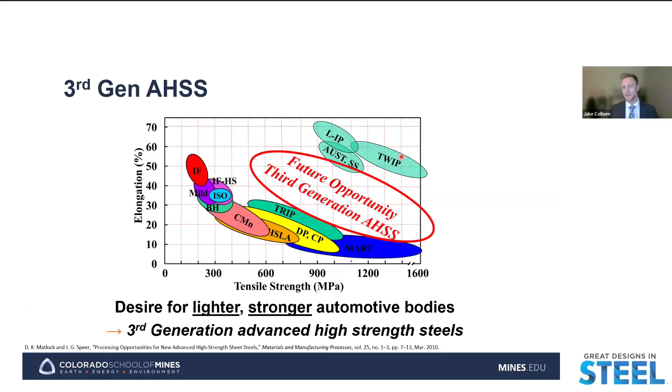While this is no longer a future opportunity, this is where we have been moving with the creation of medium manganese steels, quench and partition steels, and TBF steels, to name a few. The idea here is that we're creating these steels with a greater combination of elongation and tensile strength than the first generation advanced high strength steels, while still maintaining lower alloying cost than our second generation advanced high strength steels.

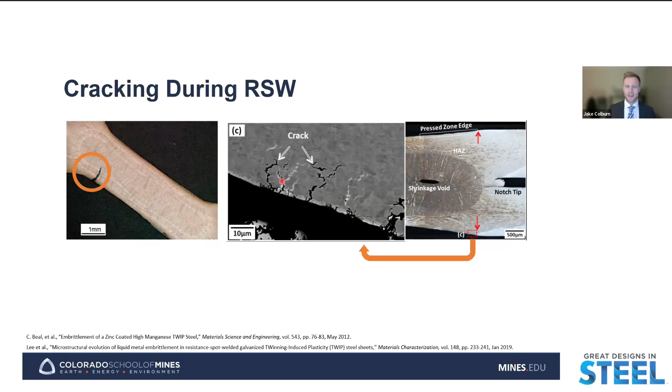However, when these third generation advanced high strength steels are galvanized with a zinc coating and then joined via resistance spot welding for the production process, we see that cracks can form along the weld shoulder and weld periphery, most notably for these steels. This cracking can lead to both the mechanical and aesthetic degradation of the welds, which can make it difficult for the automotive industry to implement these steels in usage for automotive bodies.

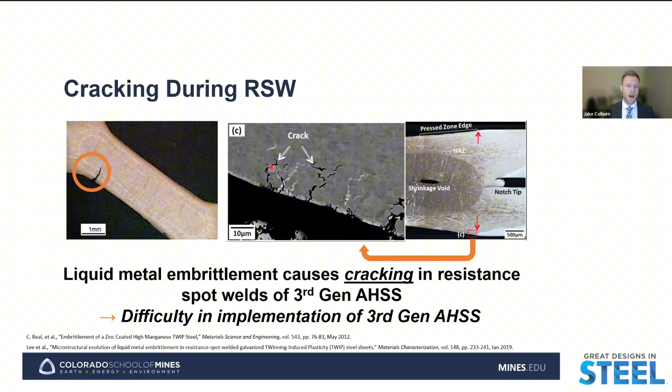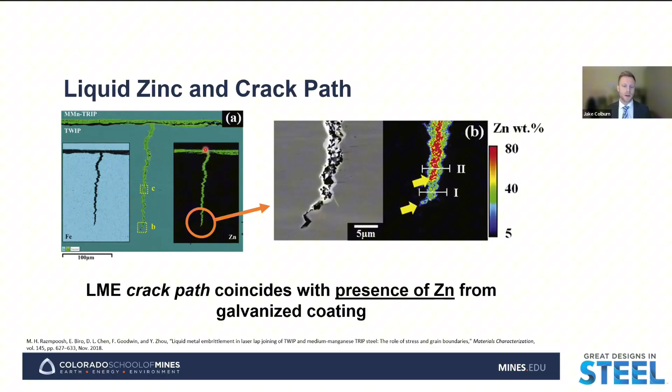Specifically for liquid metal embrittlement cracking, we saw those cracks that form in the weld shoulder, and we see that these cracks are always coinciding with the presence of zinc from the galvanized coating. This is one of the things hinting us towards the fundamental idea that LME cracking, liquid metal embrittlement cracking, occurs because as we see these cracks, we can also see the presence and penetration of zinc from the coating along with that.

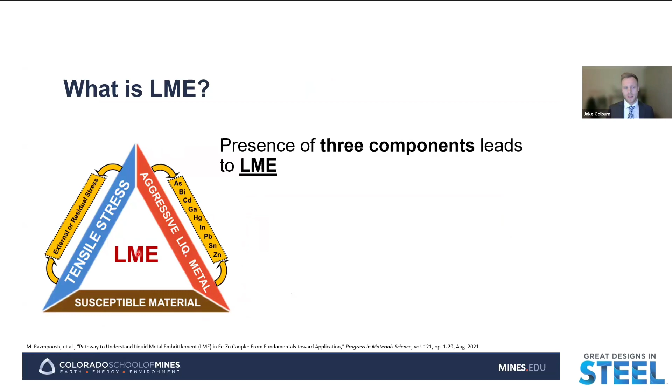I've mentioned liquid metal embrittlement, LME, a couple of times. So what specifically is LME? Here we have a triangle showing the three components necessary to create LME: tensile stresses, a susceptible material, and an aggressive liquid metal. These three components are necessary concurrently to both initiate and propagate LME.

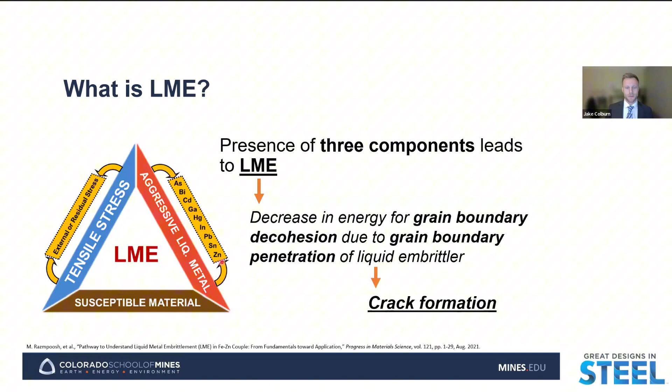LME can be defined as the decrease in energy for grain boundary decohesion due to grain boundary penetration of a liquid embrittler. Essentially, a normally ductile material behaves in a brittle fashion, and that brittle behavior is what leads to crack formation in these welds. While there are a number of binary LME couples we could be concerned with, the one we'll focus on for galvanized third generation advanced high strength steels is the zinc-iron LME couple.

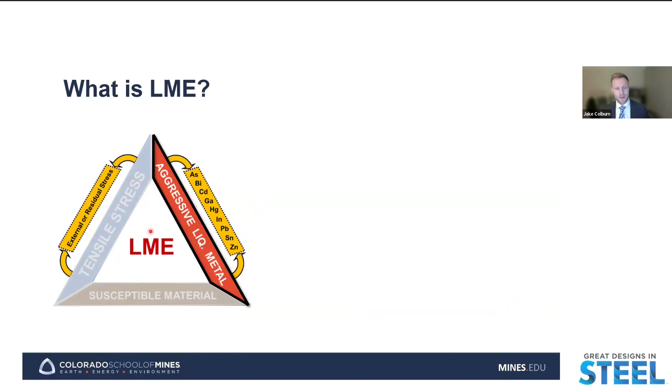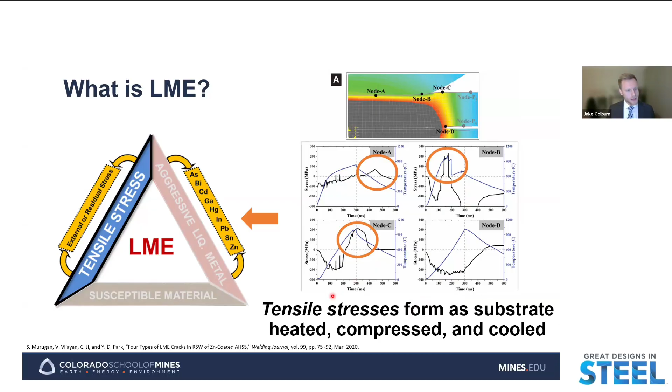As the substrate is heated during the weld cycle, we have compression from the electrode, and then rapid cooling is what develops these thermomechanical stresses necessary for LME.

As we look at our susceptible material, generally we're concerned with higher strength steels, around or above 900 megapascals, with higher fractions of austenite and martensite, and potentially bainite. For generally lower strength steels that may have larger fractions of ferrite, such as dual phase steels, LME is generally less of a concern - we have less LME susceptibility with those steels.

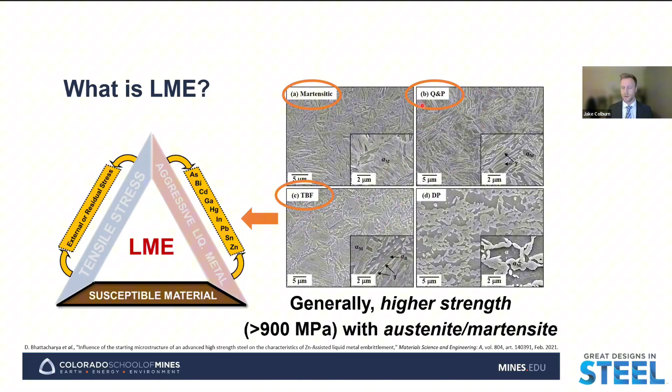However, if we have steels, even in our first generation class such as martensitic steels, that contain large fractions of martensite, retained austenite, and/or bainite - such as our Q&P and TBF third generation advanced high strength steels - these are steels more likely to exhibit LME and be susceptible to liquid zinc penetration and embrittlement.

As we think about how to tackle the problem of LME, how we can potentially mitigate or prevent it, the idea is that if you can remove the presence of one of these factors - remove a leg of this triangle during the weld process - then we should be able to mitigate or prevent LME, because we need the concurrent presence of all three factors.

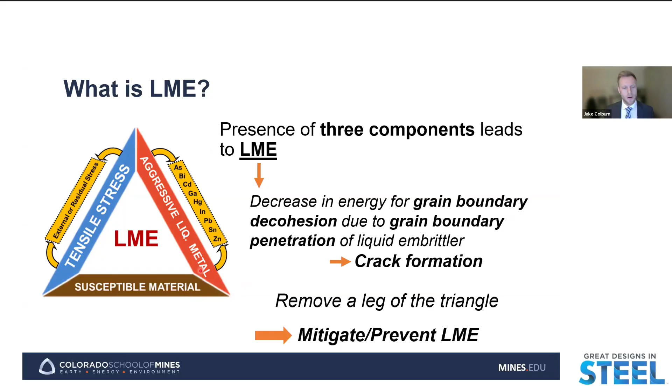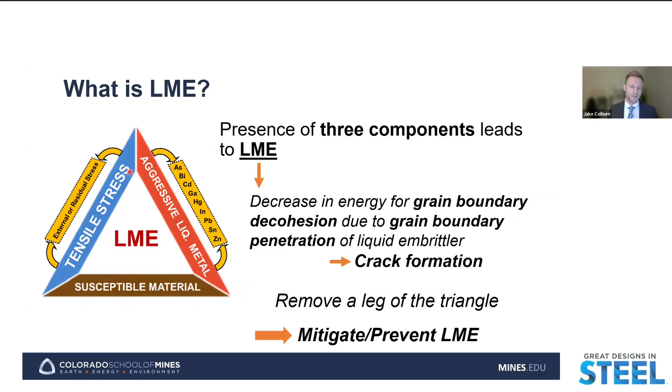Today we're going to look at how substrate composition affects LME susceptibility, seeing specifically how substrate composition can potentially either decrease or increase the susceptibility of the underlying substrate, as well as how composition in the substrate can potentially affect the presence of this aggressive liquid metal, the liquid zinc.

With that, we'll take a look at this example case examining the effect of substrate silicon and aluminum content on LME susceptibility for third gen advanced high strength steels. But first, we're just going to focus on silicon content and its effect on LME susceptibility. Here on the left, we have the composition of the two alloys we're looking at.

As a third gen steel, quench and partition microstructure, we see our four main alloying elements of concern: silicon, aluminum, carbon, and manganese. For these two alloys, we have equal compositions of aluminum, carbon, and manganese, and we're varying the silicon content from a relatively low level of 0.5 weight percent to a relatively higher level of 1.5 weight percent.

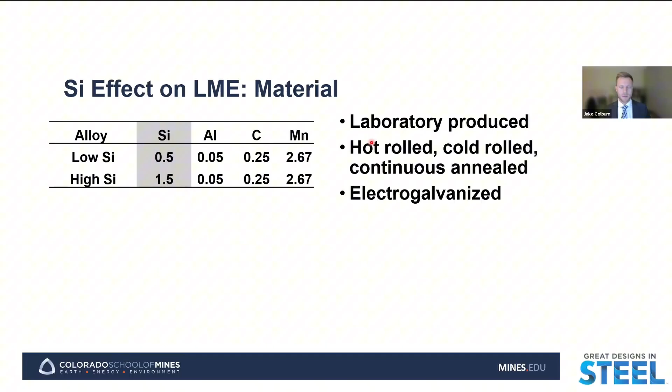The reason we have the addition of silicon and also aluminum is that those can act as carbide suppression during the quenching and partitioning process, and then also act as solid solution strengtheners. These two alloys were laboratory produced, hot rolled, cold rolled, and then went through continuous annealing simulations, and then were electrogalvanized with a pure zinc coating.

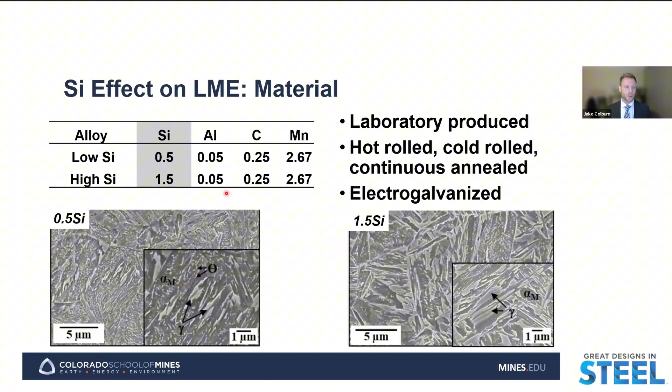If we take a look at the microstructures that we have for these two alloys, we see what we would expect again for a quench and partition microstructure: relatively high fractions of martensite, some retained austenite present, but then also notably a higher fraction of cementite or carbides in the lower silicon containing steel, due to having that lower alloying presence of a carbide suppressor in this alloy.

As we begin looking at the LME testing, one of the first tests we can do is hot tension testing, which is essentially a thermomechanical simulation of the resistance spot weld stress and thermal conditions. Of course, this is going to be a simplified condition of our stress and thermal states, because many of the stress and thermal states during resistance spot welding can be much more complicated than just the uniaxial tension we're applying during this test.

Here we have our tensile specimen that will be rapidly heated up to our test temperature, held for a short amount of time, deformed to failure, and then rapidly quenched. This test temperature at which we choose to hold the material is going to be important for both the underlying substrate microstructure, but also in terms of what iron-zinc intermetallics we could potentially expect to be present upon deformation.

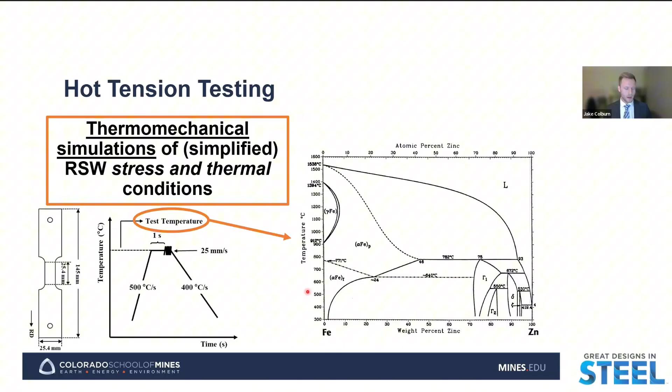Here we have our iron-zinc binary phase diagram. If we look at the zinc-rich corner of the phase diagram, we see that in our general test temperatures for hot tension testing, around 600 to 900 degrees Celsius, we have a range of different iron-zinc intermetallics, as well as the phase fraction of those intermetallics and the liquid phase present, depending upon what test temperature we'll be at and how much diffusion has occurred from the coating, and how much zinc and iron is present at that point.

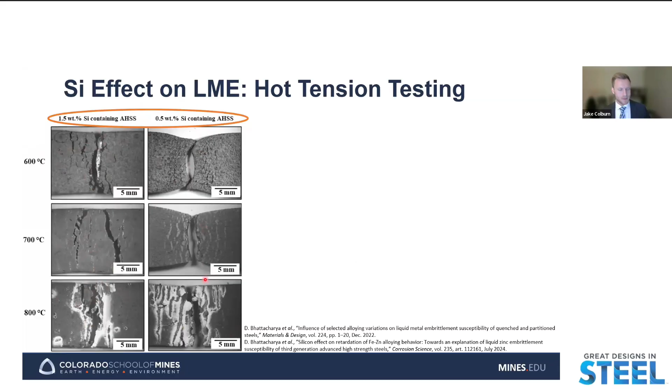The main thing we can see here is this relatively lower degree of necking in the high silicon containing advanced high strength steel, which is going to be indicative of a lower degree of ductility during testing.

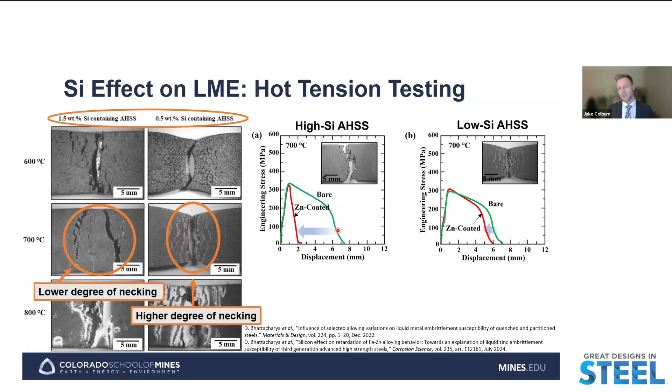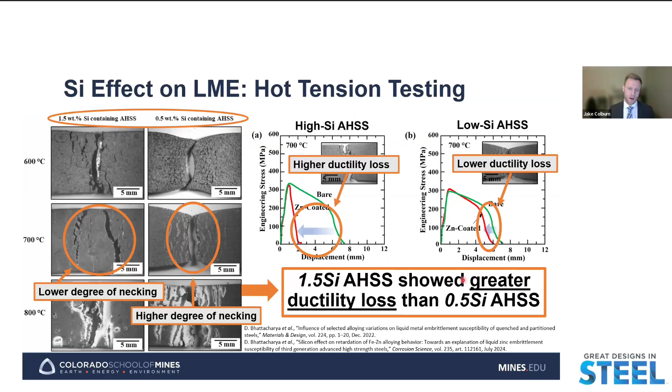We can also take a more quantitative look at the ductility loss when the sample is compared to its bare state versus its coated state, again testing at that temperature of 700 degrees C. What we see here is that there is a greater ductility loss between the bare and zinc-coated steel for the high silicon containing steel as compared to the lower silicon containing steel at 700 degrees C. Overall, we can say that this 1.5 silicon advanced high strength steel showed a greater ductility loss, a greater degree of embrittlement than the lower silicon containing steel.

If we want to take a deeper look into potentially why we're seeing the differences in this behavior, we can start by looking at some of these SEM images of the cross-section of the hot tension samples after testing at 700 degrees C.

Here we have backscatter electron images, where the contrast is going to be related to the atomic number of the elements we're looking at. Zinc, having the highest atomic number of the elements we're looking at, is going to appear with the lightest contrast. So when we have those regions of zinc that have alloyed some with iron, we're going to see a darker contrast.

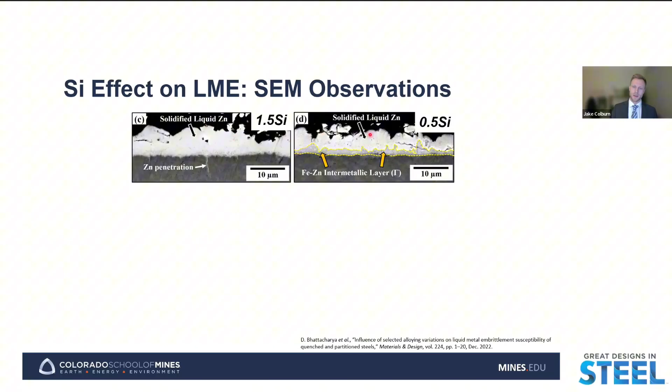And that's what we see here on the right with our low silicon containing steel, where at the interface we see the presence of this iron zinc intermetallic layer, specifically the gamma phase. And this gamma phase is important because its formation can consume the liquid zinc that is present, as well as act as a physical barrier to further zinc penetration.

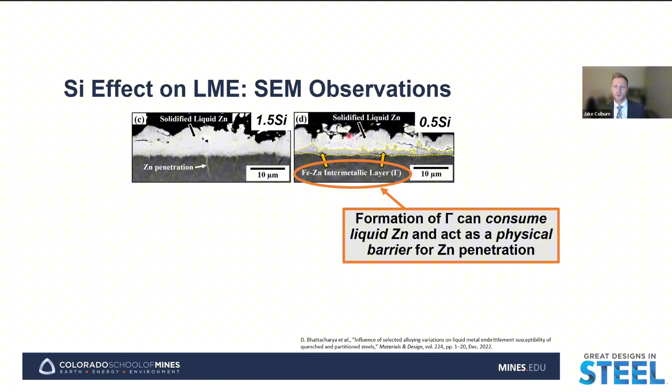So we see at elevated temperatures, at our test temperature, if this continuous physical layer of the gamma is present and we have liquid zinc above, that's going to create a barrier to the liquid zinc further penetrating the substrate, whereas with the high silicon containing steel, we don't see the presence of that intermetallic layer, and we're readily able to get zinc penetration into the substrate because there's no inhibition of the zinc into the substrate.

And then if we zoom in a little bit and take a look at a TEM lift out of the interface of that high silicon containing cross-section of the hot tension sample, here we have a STEM EDS line scan - scanning transmission electron microscopy, energy dispersive spectroscopy scan through here to where we see the composition of this line as we move from the top of this region of the coating into the substrate.

And of noticeable concern here, when we look at the silicon concentration across this line, we see a noticeable enrichment of silicon at the interface that is above that of the bulk composition. So again, if our bulk composition is around 1.5 weight percent, we see an increase of that up to roughly 3 to 4 weight percent at the interface.

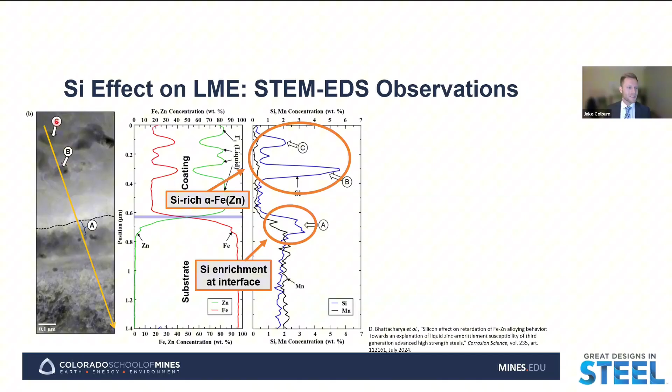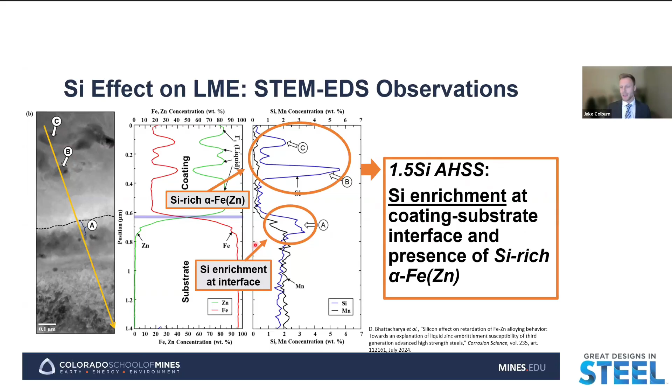But we also see the presence of these silicon-rich alpha iron zinc islands. This alpha iron zinc phase is essentially a BCC iron phase that has appreciable solubility for zinc, as well as also having a decent solubility for the silicon phase. So we see these little islands here pointed out by C and B over here of this alpha phase. Again, for the high silicon containing steel tested at 700 degrees C, we see this silicon enrichment at the interface as well as the presence of these iron alpha zinc phases.

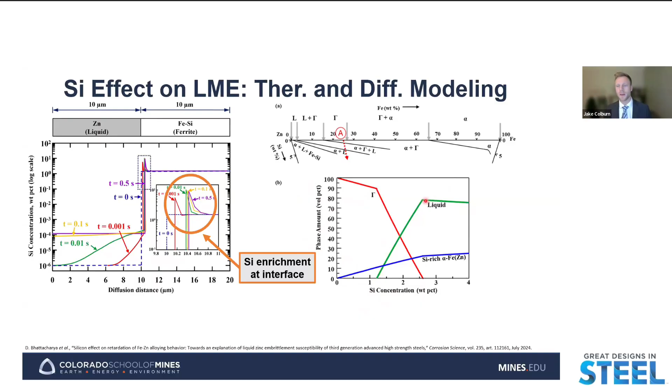And what we see is that as the silicon concentration increases at the interface, we have a decrease in the equilibrium phase fraction of the gamma phase, and then an increase in the equilibrium phase fractions of the liquid and the alpha iron zinc phases. And so that's important because if we're increasing the phase fraction, if we're further stabilizing the liquid phase, that is going to be detrimental to LME susceptibility because this is the phase that is necessary to initiate and propagate LME.

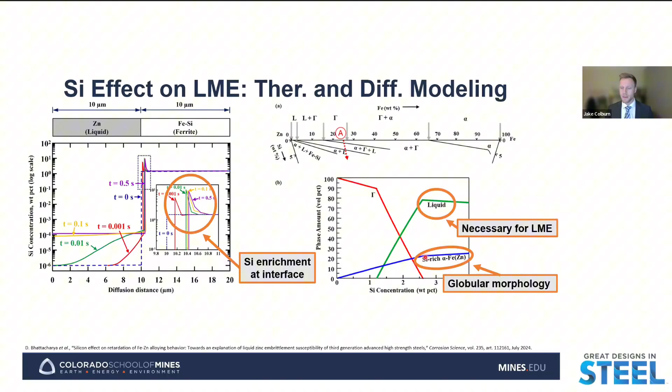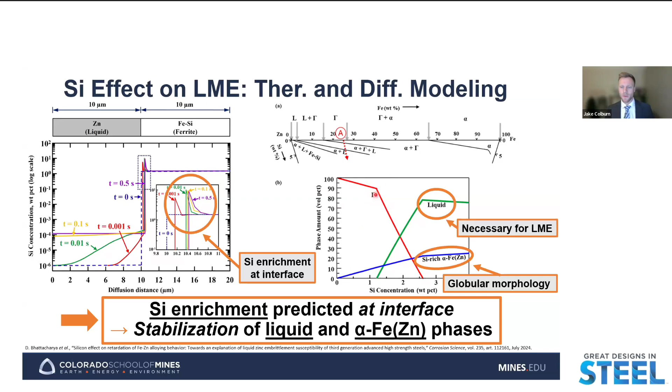If we're also stabilizing the alpha iron zinc phase instead of the gamma phase, we're stabilizing a phase that, especially in these lower volume fractions, is likely to form in a globular morphology, like those small islands we saw in the STEM image. This is what we see generally with the alpha iron zinc phase. So as we're increasing the silicon concentration in the substrate and getting enrichment at the interface, we have a detrimental situation for LME susceptibility by inhibiting formation of the gamma phase, while also stabilizing these two potentially detrimental phases for LME susceptibility.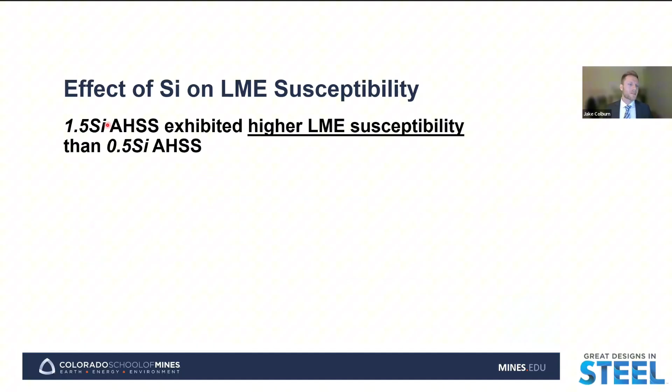If we put most of those results together, we can see that the higher silicon-containing steel exhibited higher LME susceptibility than the lower silicon-containing advanced high-strength steel. We can attribute much of that to increasing silicon content at the interface, which we saw led to suppression of the iron-zinc intermetallic reaction, specifically the gamma phase. Overall, that leads to increased liquid fractions or increased liquid availability at the interface, and therefore increased LME susceptibility. Now we're going to take a look at something else.

That's specifically looking at silicon, but now we can take a look at the effect of aluminum content on LME susceptibility. The main reason we want to do that is that, as an alloying addition, if we want to keep silicon concentration lower to not increase LME susceptibility, we can substitute some of silicon's carbide suppression and solid solution strengthening effect with aluminum. Here again we have two alloys we're comparing that have equal compositions of silicon, carbon, and manganese, changing the aluminum concentration from a low value of 0.05 weight percent to a high aluminum alloy at 1.38 weight percent.

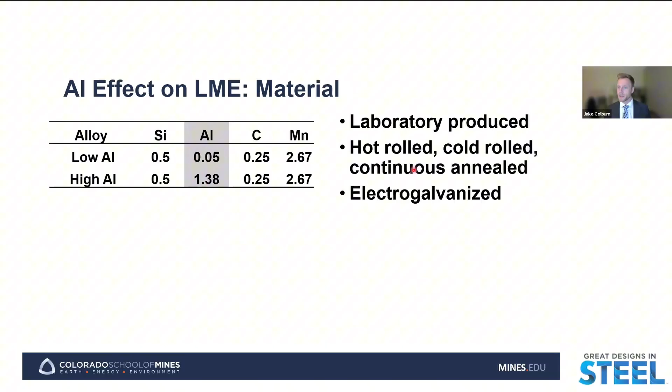These two alloys were also produced in the same way as the previous ones: laboratory produced, hot rolled, cold rolled, went through continuous annealing simulations, and then were electrogalvanized with a pure zinc coating.

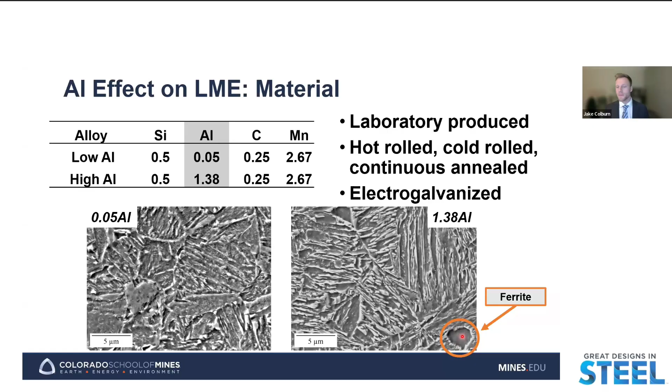If we take a look at the microstructures of these two alloys, what we see is again what we'd expect for a quench and partition microstructure: a relatively high volume fraction of martensite, some retained austenite. But notably for our higher aluminum alloy, we still see some ferrite present - this darker contrast region we identify as ferrite, also up here at the top of the micrograph. Due to the higher AC3 temperature of the high aluminum alloy, likely full austenitization was not achieved during the continuous annealing simulation, so there's potentially some ferrite still present near the surface of this alloy.

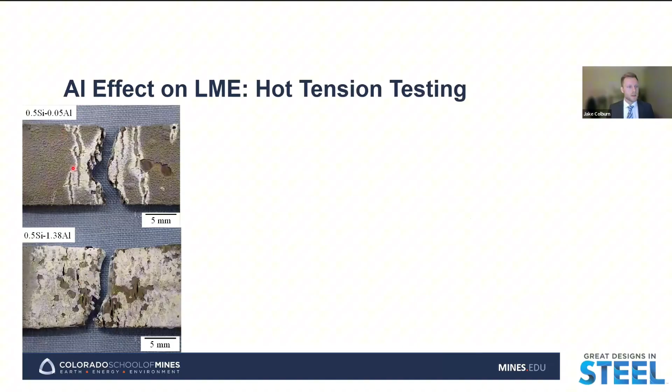If we take a look again at our hot tension test results and our macrofractography here, the low aluminum alloy at the top, the high aluminum alloy at the bottom, tested at 800 degrees C, we see a slightly greater reduced area, indicative of greater ductility present at elevated temperatures for the high aluminum alloy, as well as more secondary cracking appearing - these small cracks we see on the surface - more so in the high aluminum alloy compared to the low aluminum alloy, where a majority of the cracks seen on the surface are just cracks in the solidified coating layer.

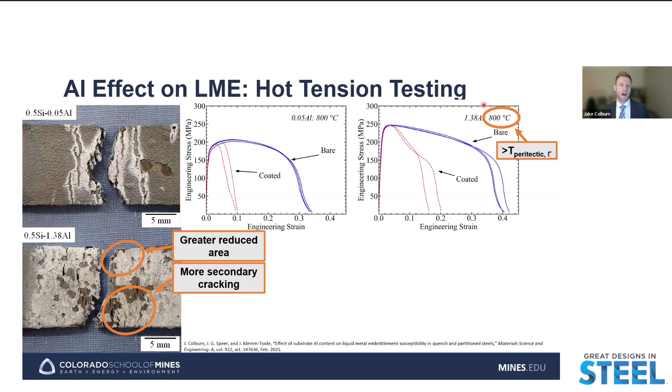This testing was done at 800 degrees C, a notable temperature because we're now above the peritectic temperature for the gamma phase. In the binary iron zinc system, we'd expect the gamma phase is not going to be stable at this test temperature. If we compare the ductility losses between the bare and coated samples of these two alloys during the hot tension test from the stress strain curves, we see a lower ductility loss for the higher aluminum alloy, to a lower extent than what we saw comparing our high and low silicon alloys, but still a noticeable difference in ductility loss between these two alloys.

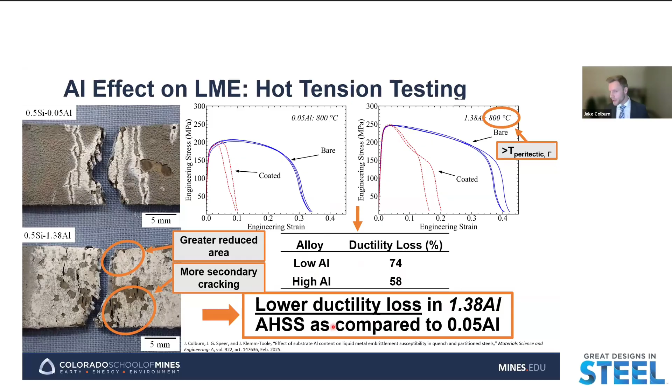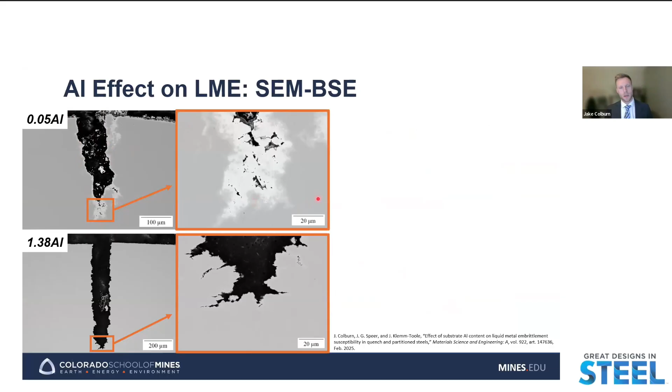We would say that the higher aluminum alloy exhibited lower ductility loss, a lower degree of embrittlement in this test. So then we start by looking at the backscatter electron images of the crack tips of an LME crack for the low aluminum sample here at the top, and the high aluminum alloy here at the bottom.

What we see here is that there is this greater degree of zinc enrichment penetration in the low aluminum alloy when compared to the high aluminum alloy. This contrast here, this lighter contrast, is indicative of higher levels of zinc in that area, and this was confirmed with the EDS.

But that higher contrast region is not really seen as much with our high aluminum alloy as compared to the low aluminum alloy. This is potentially indicative of the relative amount or availability of zinc during testing, potentially having higher levels of that zinc availability in the low aluminum alloy as compared to the high aluminum alloy.

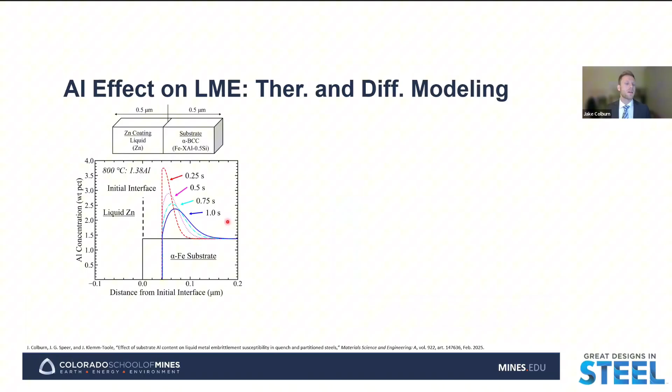We see that after simulating at 800 degrees C for 1 second, we again, like silicon, see this potential enrichment of aluminum at the interface due to the low solubility of aluminum in the liquid phase as compared to iron. So if we expect a change in that local composition at the interface, we can expect that there will potentially be a change in what phases are present and the equilibrium fraction of those phases present at the interface.

Like before with silicon, we can calculate the phase volume fraction versus the aluminum concentration at the interface. Rather than seeing that monotonic behavior that we saw with silicon, where increasing silicon content decreased the gamma phase stability across all the compositions...

Here we see that there is an intermediate range of aluminum concentration at which the gamma phase has a higher volume fraction stable than the liquid phase.

As we add aluminum up to about 3 weight percent aluminum, the liquid phase is destabilized and the gamma phase is further stabilized. But if we go higher than that, we then begin to stabilize the liquid phase and the alpha iron phase.

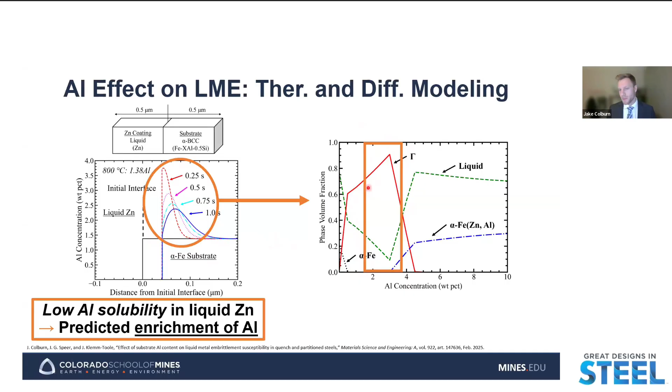But if we look at what our bulk composition is, starting at 1.38 weight percent and then potentially enriching in that 2 to 4 weight percent range, we're still in this orange box of our composition where we have much higher equilibrium volume fractions of gamma phase stable as compared to the liquid phase. So we would expect that with that interfacial composition, the gamma phase would be stable.

We would say that this is potentially going to be beneficial for LME susceptibility, decreasing the availability and presence of the liquid phase at the expense of having more of the gamma phase present.

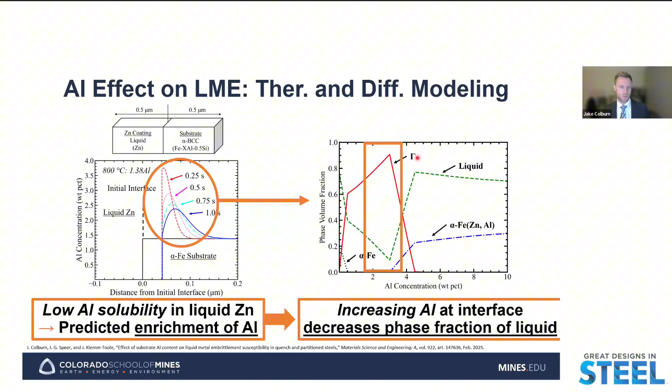We can also take a look at how the change in the substrate aluminum concentration is going to affect the diffusion of zinc into the substrate, or affect the solubility of zinc in the substrate. Here we have calculated the mass fraction of zinc in those substrate phases at 800 degrees C for increasing aluminum concentration at different zinc concentrations in the substrate.

The main trend that we see here is that as we increase the aluminum concentration in the substrate, or at that interface, we see a decrease in the mass fraction of zinc in the substrate, or essentially what the maximum solubility of zinc in the substrate would be. We see a decrease with increasing aluminum content.

But even more than that, we see that increasing aluminum concentration in the substrate also affects the diffusivity of zinc in the substrate, such that as we increase the aluminum concentration at different zinc contents in the substrate, we see the diffusion coefficient of zinc generally decreases.

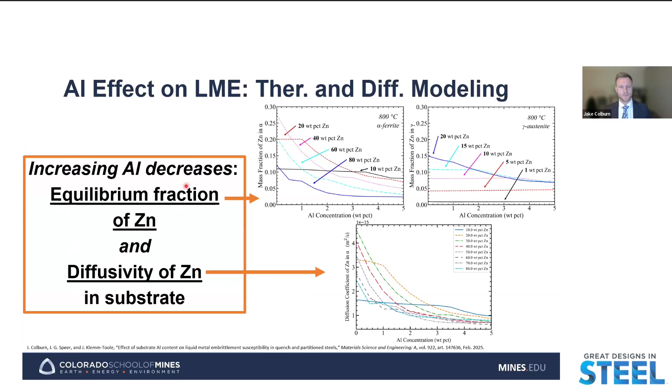So we could say that there is a general decrease in the diffusivity of zinc in the substrate with increasing aluminum content. With those two factors, if we're concerned with the flux of zinc, the diffusion flow of zinc into the substrate, we can go back to Fick's first law, where the flux of the diffusing component into another component is equal to the product of the diffusivity of that diffusing component and the concentration gradient of that diffusing component.

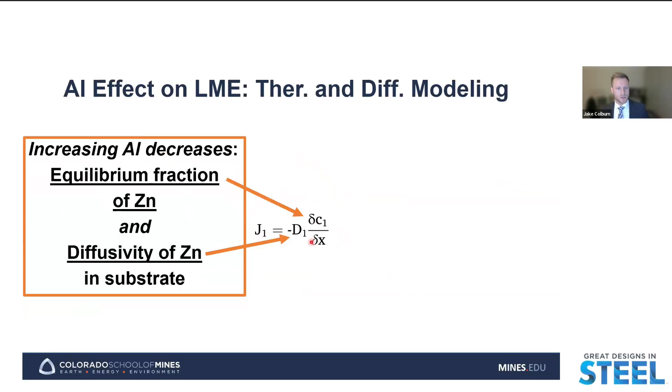Those are essentially two of the factors we just saw calculations for. If we're interested in looking at this composition or concentration gradient, we can take a look at the schematic here on the right, where we have our high zinc-containing liquid zinc on the left side, our substrate on the right side, which initially has 0 zinc concentration. Here at the interface, if we're changing the maximum solubility or equilibrium concentration of zinc in the substrate by adding aluminum, we're going to be changing the concentration gradient into the substrate.

So we see that moving from a low aluminum concentration at point A to a high aluminum concentration at point B is going to decrease the equilibrium fraction of zinc, the maximum solubility of zinc in the substrate, such that as we move a distance into the substrate where there is no zinc, that concentration gradient is going to be decreased.

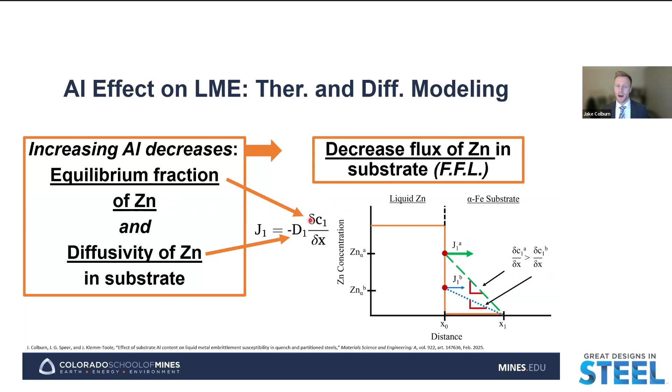So we see that increasing the aluminum concentration should potentially decrease the flux of zinc in the substrate through both of these factors, by decreasing both the diffusivity of zinc and the concentration gradient of zinc into the substrate.

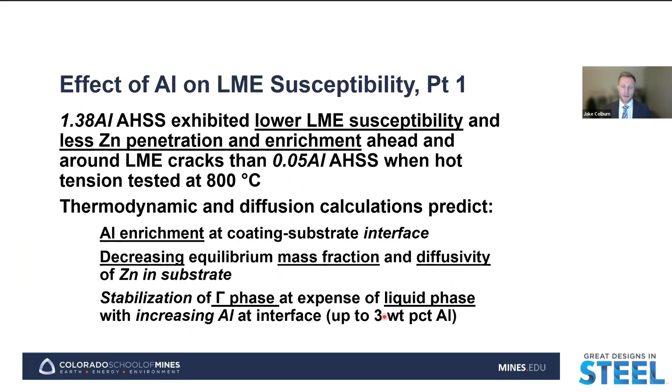So taking some of those points together in a quick sub-summary: the higher aluminum alloy showed lower LME susceptibility and zinc penetration and enrichment compared to our low aluminum alloy. From those thermodynamic and diffusion calculations, we predicted potential aluminum enrichment at the interface, a decrease in the equilibrium mass fraction and diffusivity of zinc in the substrate, and the stabilization of the beneficial gamma phase at the expense of the detrimental liquid phase with increasing aluminum at the interface, up to roughly 3 weight percent aluminum. Above that, the liquid phase begins to be stabilized to a greater degree again.

So then the next step was to ask: if those are the conclusions from hot tension testing, will we see similar results in resistance spot weld testing?

The LME testing in resistance spot welding consisted of creating a single square pulse weld at an increasing current through the 6 to 9.5 kiloamp range in 0.5 kiloamp increments, with a weld time of 600 milliseconds, roughly twice the standard for this sheet thickness. We did that to ensure adequate heat input to initiate LME at each of the weld conditions used.

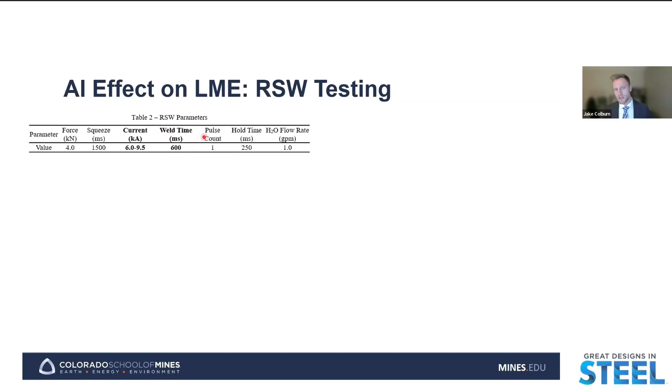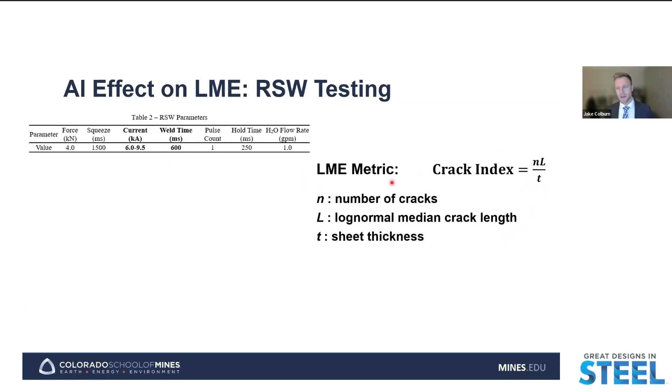The LME metric we're interested in using here is the crack index, which is the product of the number of cracks and the log-normal median crack length for a given sheet thickness. A higher crack index is indicative of higher LME susceptibility because there's either a greater number of cracks and/or a greater average length of those LME cracks.

Here's the figure on the left, comparing the average crack index of these two alloys at different weld currents relative to the expulsion current. We compare relative to the expulsion current to try to compare these welds at relatively equal heat inputs, because these two alloys have different expulsion currents due to the higher alloying addition in the high aluminum alloy. We see that the higher aluminum alloy exhibited a lower crack index, or lower LME susceptibility, at each of these current levels, except at the 0.5 kiloamp condition, where we see relatively equal LME susceptibilities or crack indexes for the two alloys.

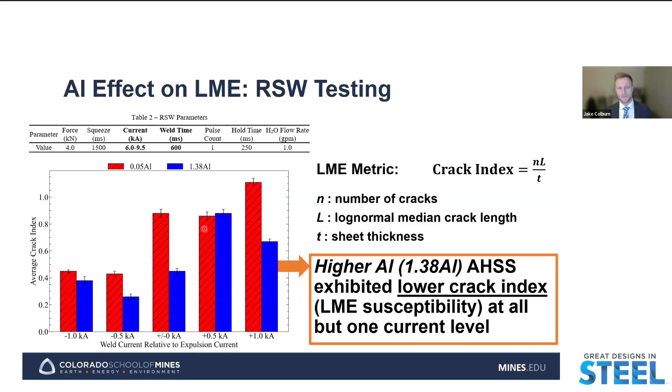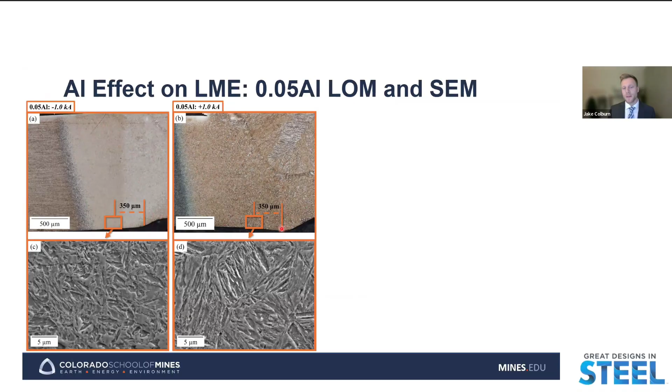Now taking a look at the cross-section of these welds, here we have the low aluminum alloy welded at 1 kiloamp below and above its expulsion current. We see a cross-section of the weld with the weld shoulder and weld periphery in these optical micrographs, where the substrate was etched with 2% nital. What we see is that even 350 microns into the weld periphery, we still see what could be described as the supercritical heat affected zone, where the microstructure is mostly martensitic with potentially still some bainite at this lower current.

This would indicate, if this is a supercritical heat affected zone, that at the peak temperature of the weld, this region was likely fully austenitic. Then as the weld current stopped and the substrate rapidly cooled, we get this transformation to martensite and/or bainite present.

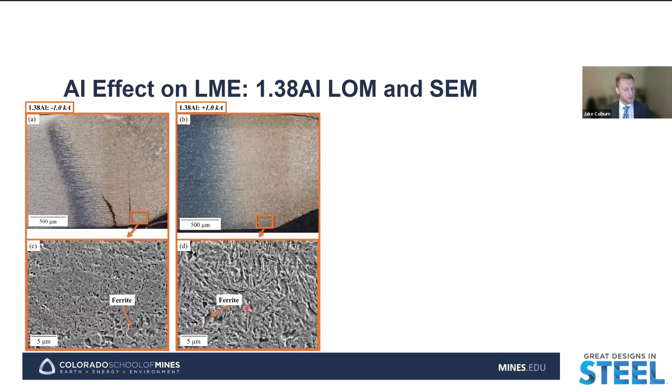But then when we compare that to the high aluminum alloy, looking at the optical micrographs of the high aluminum alloy welded at 1 kiloamp below and above the expulsion current, we see that at the weld shoulder there's still noticeable amounts of ferrite present in the microstructure. So we can describe this as being part of the intercritical heat affected zone in the weld periphery.

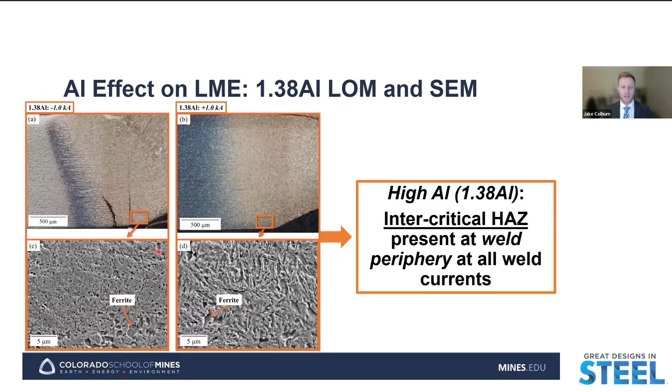So at the peak temperature of the weld, we would expect that this region was potentially austenite plus ferrite as well, and that there wasn't full austenitization of this region at the peak temperature, so that ferrite remains stable upon quenching. And as we take a look at the transformation temperatures, we see that this trend begins to somewhat make sense.

As we compare the AC1 and AC3 temperatures for these two alloys, the AC1 temperature, being the temperature upon heating which we enter the austenite plus ferrite two-phase region, we see roughly equal values there, 740 degrees C for the two alloys.

But then as we look at the AC3 temperature, that's the temperature heating from the austenite plus ferrite two-phase region into the single-phase austenite region, we see an increase of roughly 120 degrees Celsius for the high aluminum alloy, which is then also going to increase the width of that intercritical transformation temperature range, that being the difference between those two transformation temperatures.

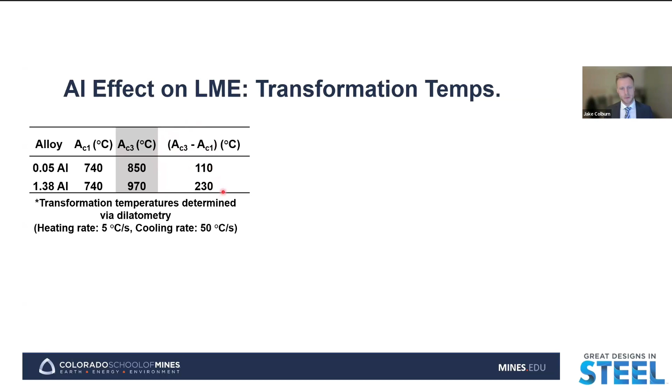So if we again go look back at the high aluminum and low aluminum optical micrographs of these welds, what we see is again indicative of these transformation temperatures, where we see a smaller intercritical heat affected zone width for both currents as compared to this wider intercritical region that we see for the high aluminum alloy, where there's still ferrite present in these regions.

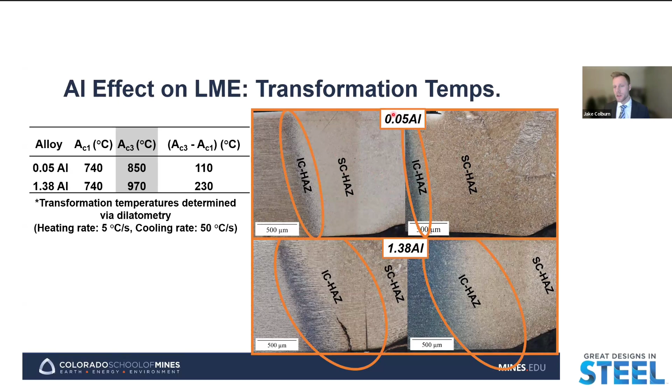And then if we take a look at the supercritical heat affected zone, we see that that region extends to much greater distances into the weld periphery for the low aluminum alloy than we see for the high aluminum alloy, where potentially this supercritical heat affected zone is not extending at all into the weld shoulder and the weld periphery.

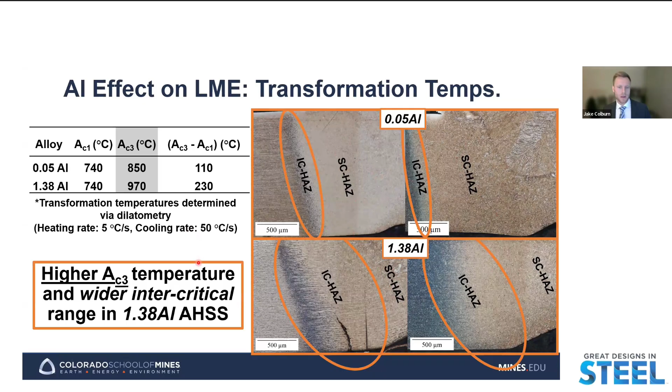So then the question is, why does it matter if we have an intercritical or a supercritical heat affected zone at these LME susceptible regions?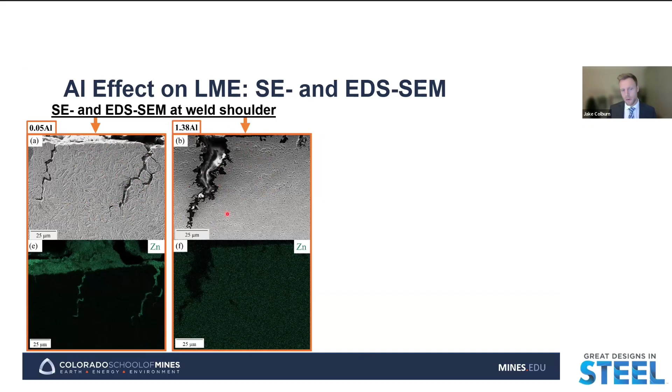But more than that, we also see that there's a difference in the zinc penetration and enrichment between these two alloys, where in the low aluminum alloy we have this noticeable zinc penetration and enrichment along and ahead of these LME cracks at the shoulder, whereas with the high aluminum alloy there's really no noticeable zinc enrichment or penetration that we can detect here in EDS with the scan, to where any of this zinc contrast that we see here is just going to be background noise due to a difference in the counts per second between the substrate and the mounting material.

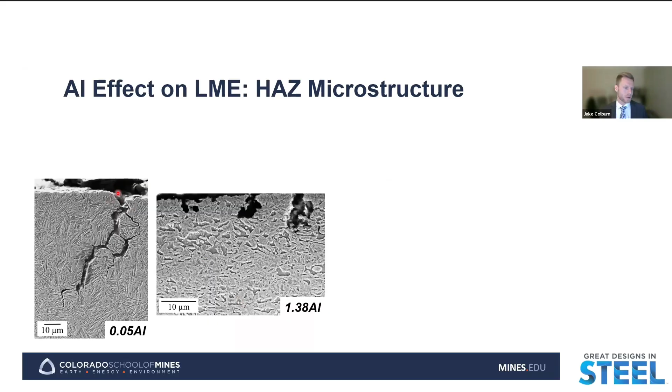But even more than just affecting potentially the zinc enrichment penetration behavior, changing whether we have an intercritical or supercritical microstructure at these LME susceptible regions can potentially affect the crack propagation path. At peak temperatures, we expect the supercritical heat affected zone to be single phase austenite, so we can get zinc enrichment penetration along those prior austenite grain boundaries more easily than in the intercritical microstructure, where we have austenite plus ferrite at peak temperatures. We can even see here these small cracks formed that are roughly 10 microns or less, where there's potentially some crack arresting here due to not having sufficient zinc penetration into the substrate.

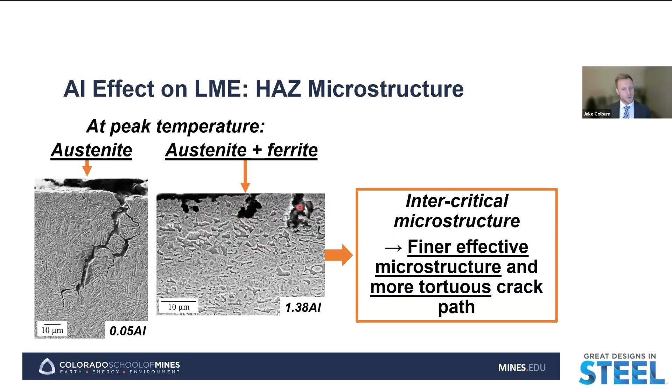So at the austenite plus ferrite phase, we can have this finer effective microstructure at peak temperature, as well as potentially a more tortuous crack path that makes it more difficult for cracks to propagate and grow.

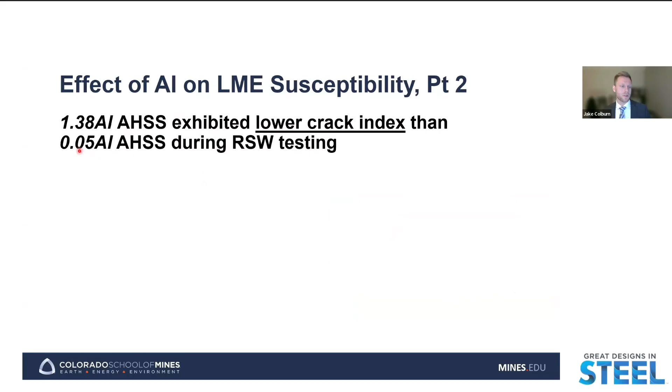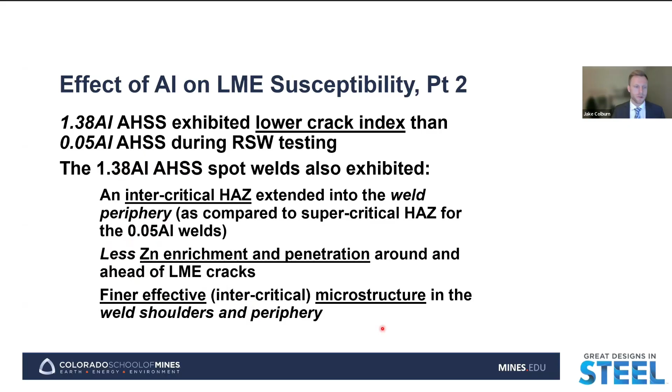Putting those conclusions together, we see that the high aluminum alloy exhibits a lower crack index during spot welding testing than the low aluminum alloy. The high aluminum alloy showed an intercritical HAZ in the weld periphery compared to the supercritical HAZ in the low aluminum alloy. We also saw less zinc enrichment and penetration for the high aluminum alloy, and a finer effective microstructure in the weld shoulder and periphery.

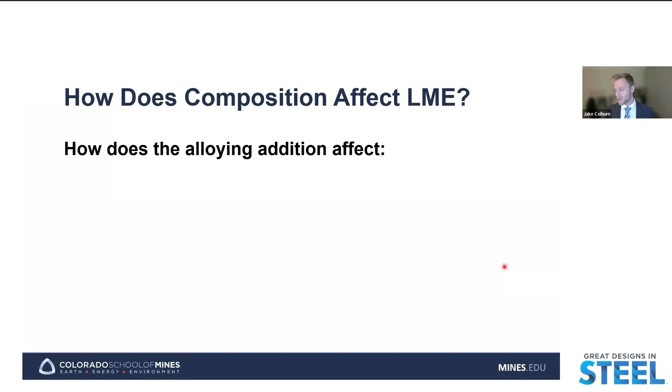With that, we want to take some of those conclusions regarding the effect of silicon and aluminum on liquid metal embrittlement susceptibility and see if we can apply them more generally to any alloying addition of concern in an advanced high-strength steel. We can begin by asking three questions about how an alloying addition affects LME susceptibility.

The first question is how the alloying addition affects the stability of iron-zinc intermetallics versus the liquid phase. The second is how it affects the substrate microstructure at elevated temperatures. The third is how it affects zinc diffusion and penetration.

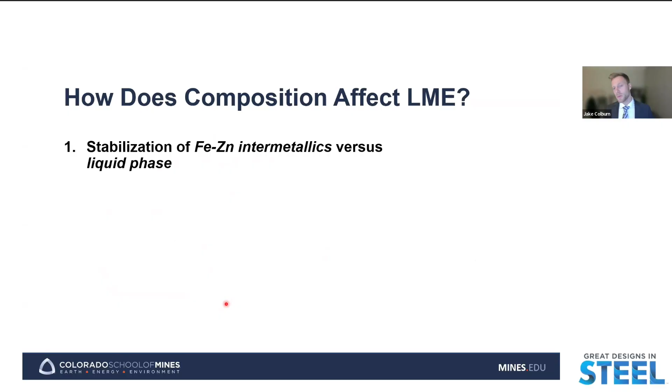Going deeper into the first question, the stabilization of iron-zinc intermetallics versus the liquid phase, we can go back to what we looked at earlier about how increasing aluminum and silicon concentration at the interface affects the equilibrium phase fraction of the phases of interest that are stable there.

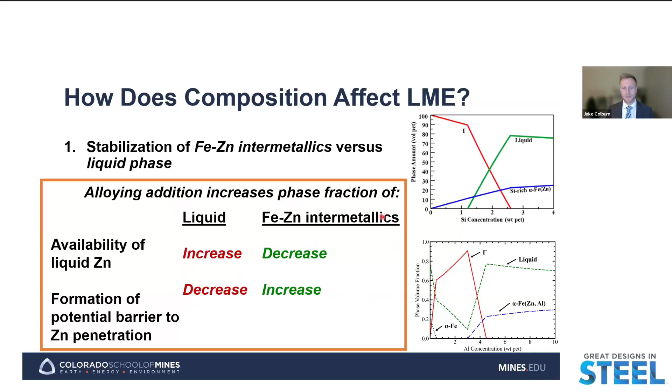If that alloying addition stabilizes the liquid phase, we increase the availability of liquid zinc while decreasing the potential for forming a barrier to zinc penetration. Whereas if the alloying addition increases the phase fraction of iron-zinc intermetallics, most notably the gamma phase, we'd have a potential decrease in the availability of liquid zinc and an increase in forming that barrier to zinc penetration. So increasing liquid fractions is detrimental for LME susceptibility, while increasing the iron-zinc intermetallic phase fractions is positive for LME susceptibility.

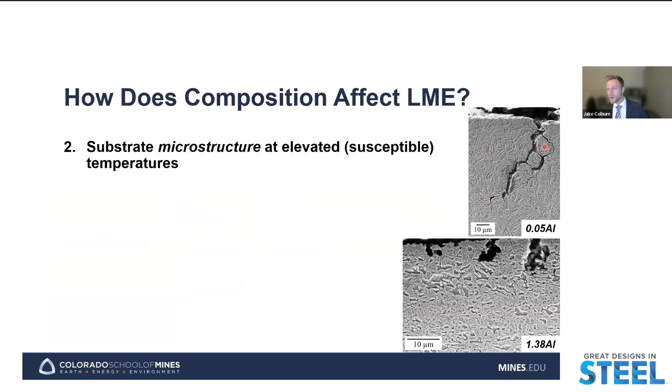Then for the substrate microstructure question, comparing a supercritical HAZ to an intercritical HAZ, the microstructure present affects the effective microstructure size. So we ask: how does that alloying addition affect the effective microstructure size? Are we potentially having single-phase or two-phase microstructure present at elevated temperatures? What is the fraction of those more susceptible phases at elevated temperatures, as well as their location? So whether we have an intercritical or supercritical HAZ, or some other type of heat-affected zone or microstructure, at those susceptible locations of the weld is important.

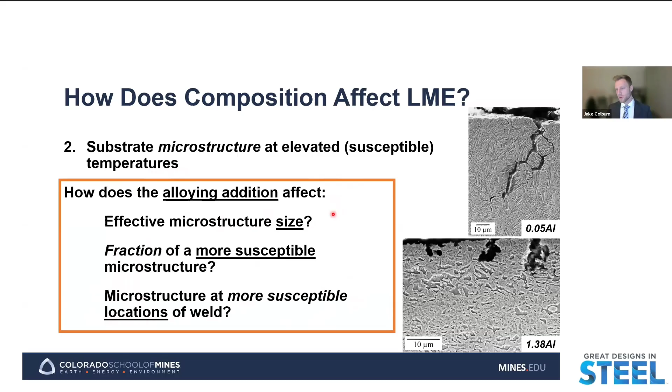So we'd be interested in knowing how that aluminum addition affects, for a given weld parameter, what the microstructure would be at the weld shoulder and weld periphery.

Then taking a look at zinc diffusion and penetration, the main question we could ask is how does that alloying addition increase or decrease the thermodynamic propensity and driving force for zinc penetration and diffusion? As we add that alloying element, are we going to increase or decrease the driving force for zinc to diffuse and penetrate into the substrate, which would be detrimental to LME susceptibility?

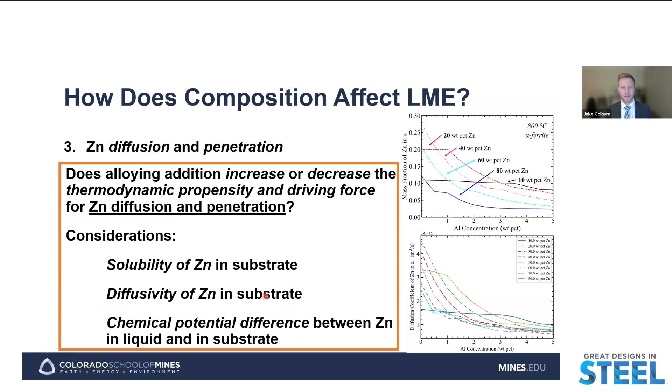The considerations here include two we looked at today: the solubility and diffusivity of zinc in the substrate. But even more fundamentally, we look at the driving force for diffusion, which is the chemical potential difference between zinc in the liquid and zinc in the substrate, and how that alloying addition plays into that chemical potential difference—even how it affects the chemical potential difference when the substrate is under stress, and the overall driving force of zinc diffusion.